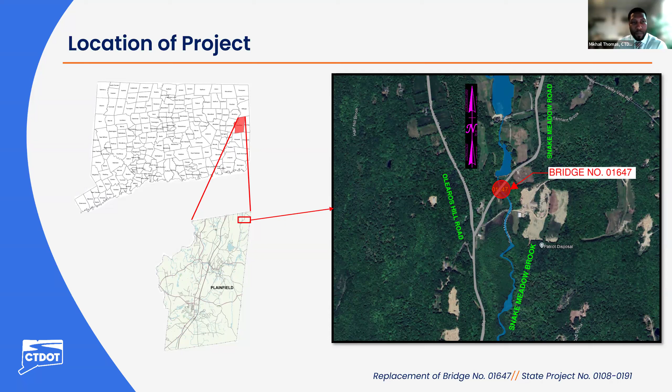The purpose of this project is to restore the bridge to a state of good repair. The existing superstructure is in poor condition with ongoing deterioration that cannot be addressed through normal rehab methods. The bridge is also currently posted for a weight restriction of 18 tons for a single unit vehicle and 29 tons for a swing unit vehicle. Therefore, a full replacement is warranted. The bridge is being monitored annually to better track its condition.

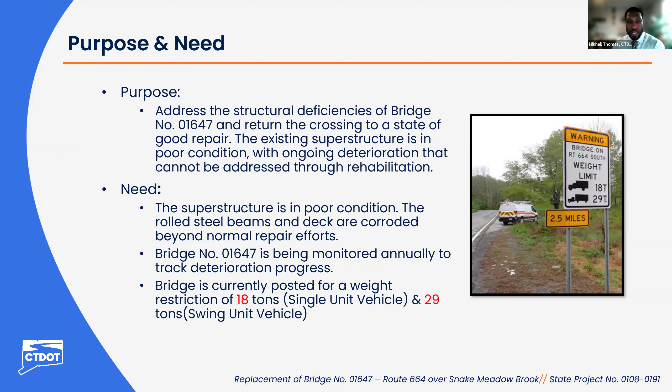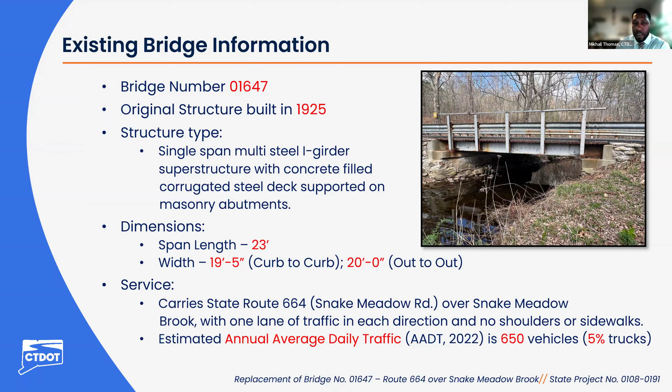Just some background information on the existing bridge. The existing structure was originally built in 1925 and reconstructed in 1972. It consists of a single span steel girder with a concrete-filled corrugated deck superstructure supported on masonry abutments. The current span length is about 23 feet and the curb-to-curb width is about 19 feet 5 inches, which is narrow by today's standards. The bridge carries 1 lane of traffic in each direction with no shoulders. The annual average daily traffic reported in 2022 is about 650 vehicles, 5% of which are trucks.

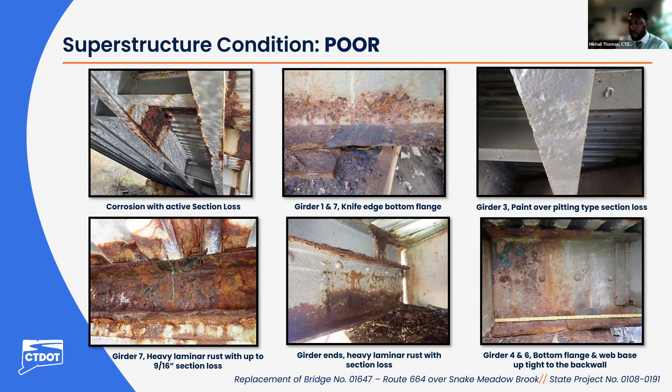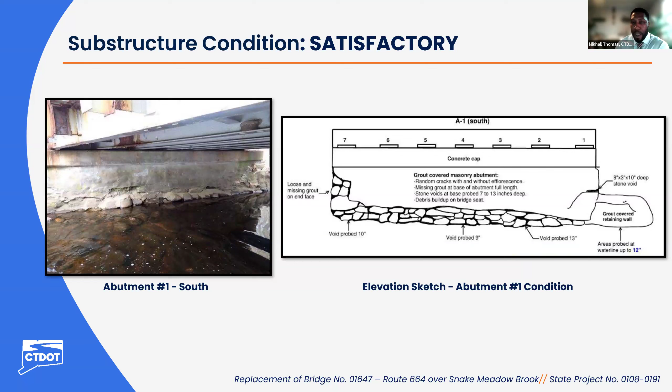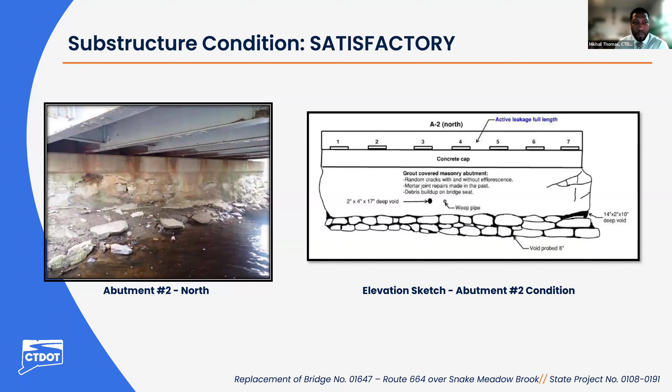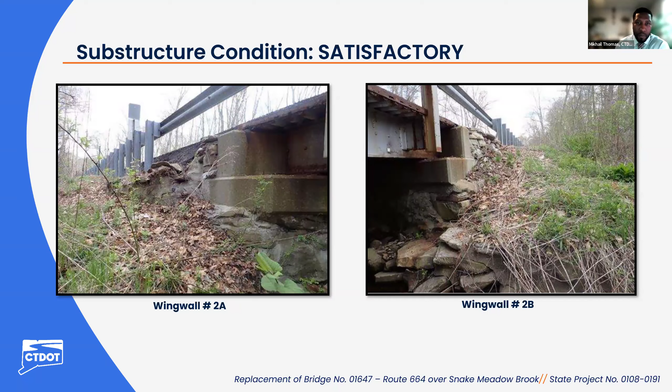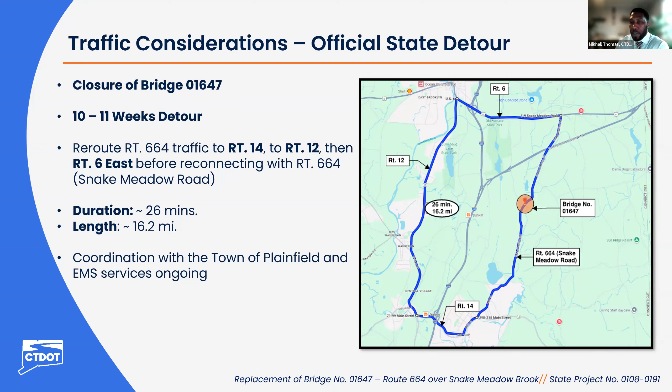The reason for the detour length is because for state projects, we try as much as possible to utilize all state routes to avoid rerouting commercial truck traffic to local roads. However, the planned road closure at the bridge location and other local town roads will remain open for use by local residents. Based on the current project schedule, the anticipated detour schedule will be in place between mid-June to late August in 2028. Coordination with the town of Plainfield and EMS services is ongoing to ensure a successful detour and to ensure all emergency services remain functioning reasonably for the detour duration.

For environmental considerations for this project, the department's Office of Environmental Planning investigated the potential environmental concerns associated with the project location. Based on their investigation, there are no conflicts with or impacts to socioeconomic resources, public parks, recreational areas, and any scenic roads.

From an archaeological perspective, the project area of potential effect has moderate to high archaeological sensitivity, so tribal consultations and field surveys were conducted to determine the possibility of finding any historical buildings or artifacts. Based on the findings from the surveys and consultations, no cultural material in any natural soil levels were encountered. There are also no concerns with impacts to historic properties.

However, there is a potential presence of federal species such as the tricolored bat and the monarch butterfly within the surrounding project vicinity. These species will not be impacted during construction work.

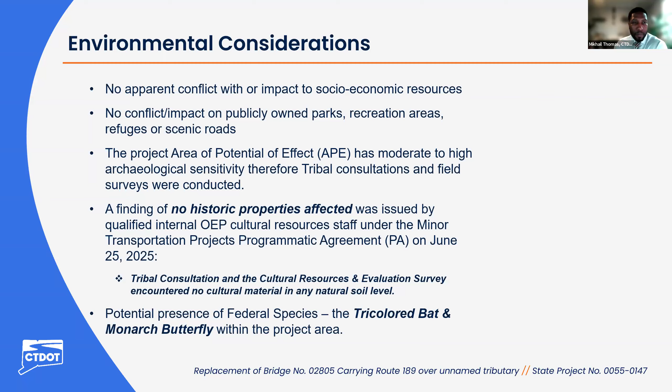Moving on to utility considerations for this project, the only observed utilities are overhead lines that run along the north side of Snake Meadow Road and crossing over the bridge inlet. These overhead utilities do not convey power, but only have communication lines.

This slide indicates a potential temporary utility relocation plan to maintain service during construction based on discussions with the utility companies and internal staff. The blue lines represent the existing overhead utilities layout, and the red line indicates the temporary utilities relocation layout. 2 temporary poles will be installed on the south side to facilitate the temporary layout.

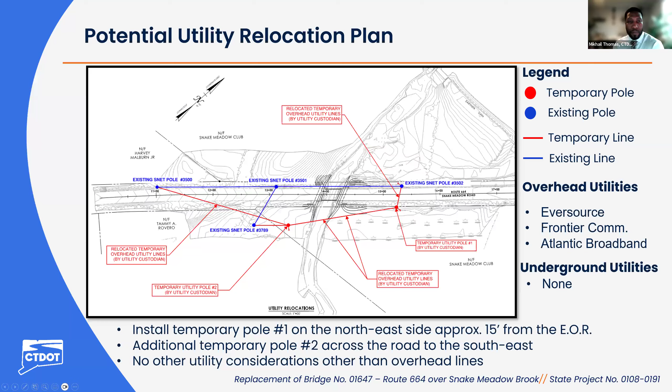Potential impacts to adjacent properties were also considered. In the slide, the state right-of-way limits are shown in red solid lines on either side of Snake Meadow Road. They are approximately 12 feet off the existing edge of road. Potential temporary construction easements are shaded in blue, which may be necessary for utility relocation work and construction activities. Potential slope easements on adjacent properties are highlighted in green, which may also be necessary for permanent grading of the earth embankments near the bridge structure. Overall, right-of-way impacts are deemed to be relatively minor from our preliminary analysis.

I will now hand it over to Zach, who is the property agent from our right-of-way unit, who will be responsible for coordinating any right-of-way impacts to adjacent properties with property owners. He will explain the right-of-way acquisition law and process.

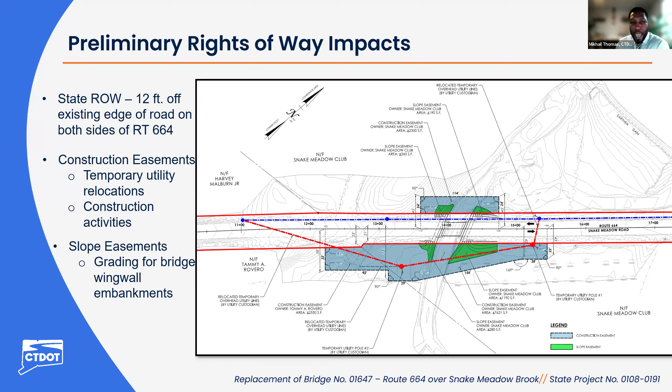Thank you. Again, my name is Zach Guarino. I'm a project coordinator of the department's division of rights-of-way, and our office is responsible for acquiring the property rights that are needed for the project. As mentioned, I'll be going over the acquisition process and what you can expect from the department. I'd just like to mention that the specific impacts are still being finalized and they may change as the design progresses. Any required property rights will be acquired in accordance with Connecticut General Statute Sections 13A-73 and 13A-98E, as well as the Uniform Act.

The right-of-way acquisition process begins once the design has progressed to a development milestone and all impacts have been determined. At this point, each affected property owner will receive a formal letter of intent to acquire from our office, along with a property map depicting the exact property rights to be acquired.

On the screen here is an example of a property map that an owner may receive. It shows the existing conditions as well as the proposed improvements.

Our office will determine the fair market value of the property rights depicted on that map and use it to establish an offer of just compensation. That offer is sent to the property owner in writing, and a right-of-way agent will be available to meet with the owner, explain the project, go over the specific impacts to the property, and explain how the state arrived at its offer.

The property owner will be given a reasonable amount of time to consider the state's offer and enter into negotiations. When an agreement is reached, the department will prepare all necessary paperwork to record the deed and property map on the town land records.

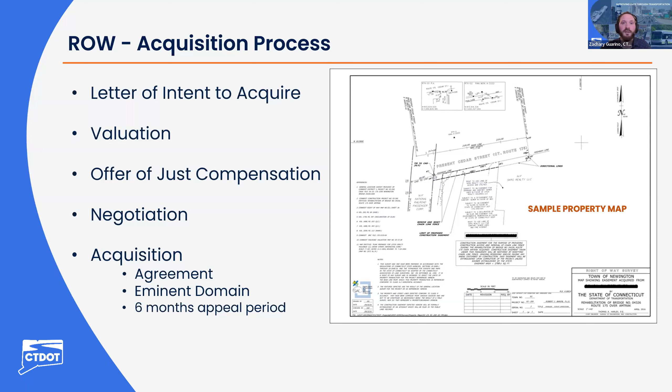With that, I'm going to hand it over to Rahul to continue. Thanks, Zach. We'll now move on to showing you a better look at the proposed bridge replacement structure.

To summarize the reason for the project, the existing bridge is in poor condition with a poorly rated superstructure and ongoing deterioration despite past maintenance efforts. We also need to provide a roadway width up to current highway design standards in case of future road widening efforts, and increased hydraulic capacity for water flows is also necessary.

The scope of the project will be to relocate overhead lines temporarily away from construction activities, and then replace the bridge under a short, full road closure and detour.

The new structure type will be a single-span bridge using precast concrete beams and cast-in-place concrete deck as the superstructure, and the abutments and wing walls will also be precast concrete, forming the substructure. The superstructure and substructure will be directly connected to one another to avoid costly bridge joints. This type of bridge is called a fully integral abutment bridge.

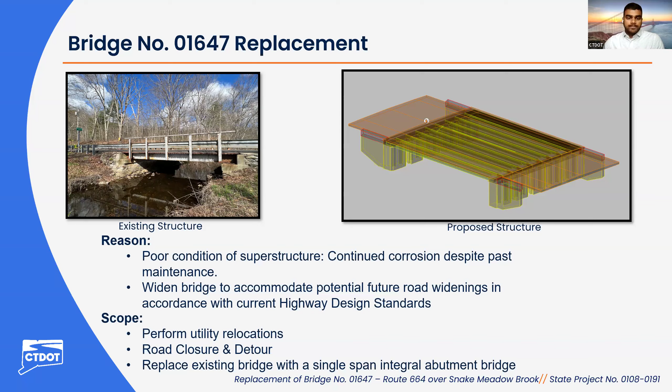This is an aerial view indicating the potential layout for the proposed 45-foot span fully integral abutment bridge from a bird's eye view. The proposed span will be much wider than the current 23-foot span existing bridge.

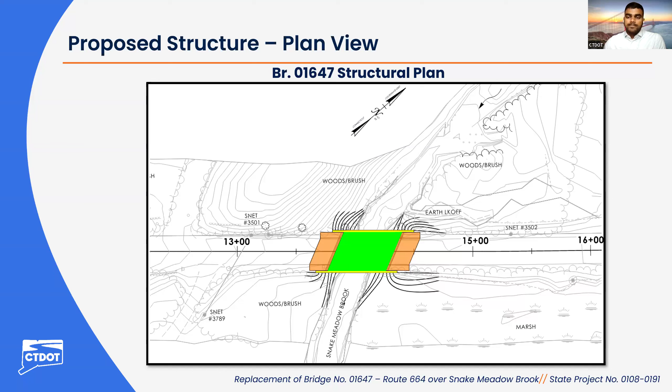This is an isometric view of the proposed structure, showing the bridge in greater detail. From this view you can see the precast abutments and wing walls, which will be supported by H-piles driven into bedrock as the bridge foundation.

You can also see the precast beams and cast-in-place concrete deck as discussed earlier, and cast-in-place concrete parapets, shown in yellow, or barriers. They serve as fall protection for the traveling public and can be seen better from this view. The bridge will also include cast-in-place concrete approach slabs leading up to the bridge.

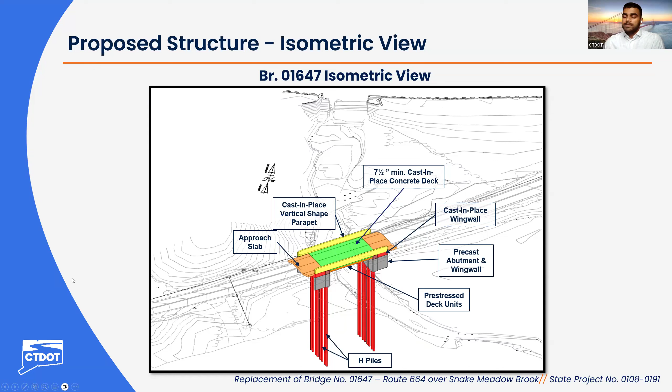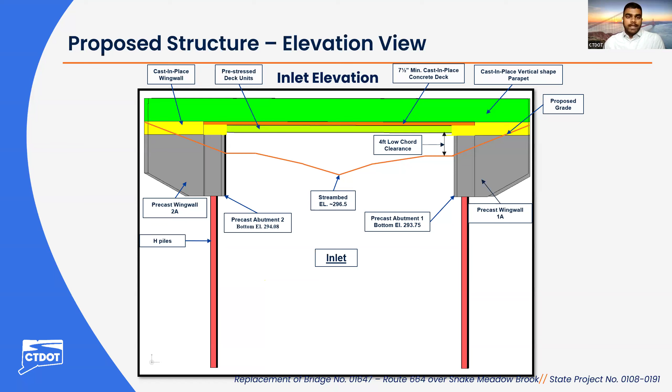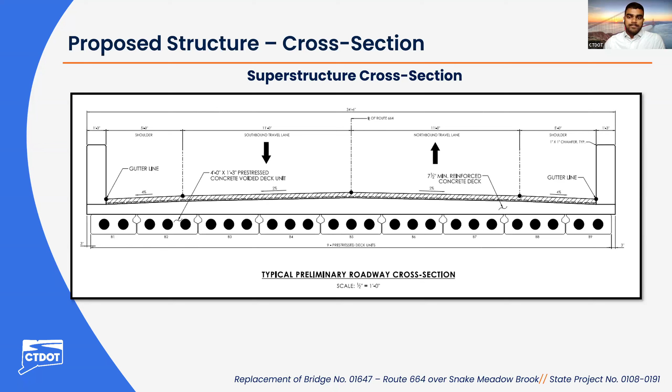We'll now give you a brief demonstration of the construction sequence for this bridge. First, the existing superstructure will be demolished. Then cofferdams will be installed around the existing and proposed substructure locations. The existing substructure will then be removed.

Piles will then be installed. Once the piles are installed, the precast substructure will be placed over the pile tops, and the connections and voids will be filled with concrete to complete the substructure. Then the cofferdams will be removed.